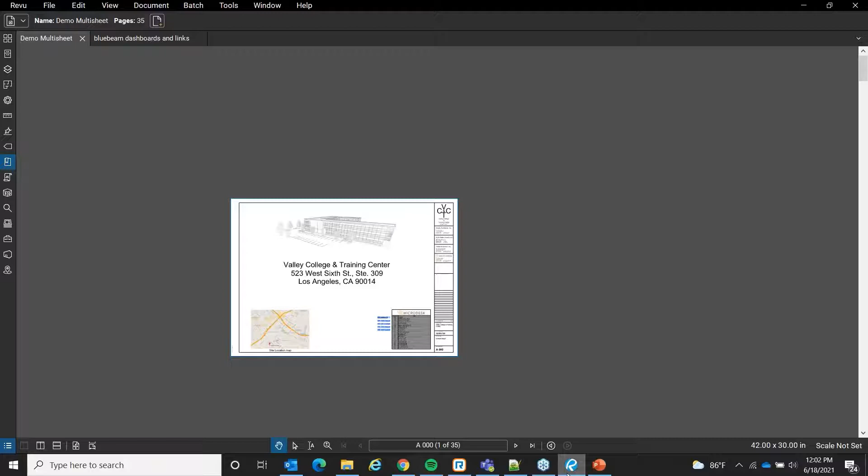All right, so let me go ahead and open up Bluebeam. Okay, and this is just our multi-sheet PDF that we have. So when you initially generate a PDF, all you really have is your thumbnails, and the page labels are just generated from the file name or the sheet name if you're doing it from Revit or Civil 3D. And it may not be all that expressive or useful.

So there's no bookmarks created, there's no real linking happening, so you have to actually help your team do this. So first thing we're going to go over here is how to create decent page labels, and that's using the auto mark tool in Revu.

So that is in the thumbnail pane. I'm just going to go ahead, and I can do these individually if I wanted to, but I'm going to go ahead and try to use the automated tool here, to create page labels.

So this way, I can help people look at the thumbnail and have a better idea of what the sheet is.

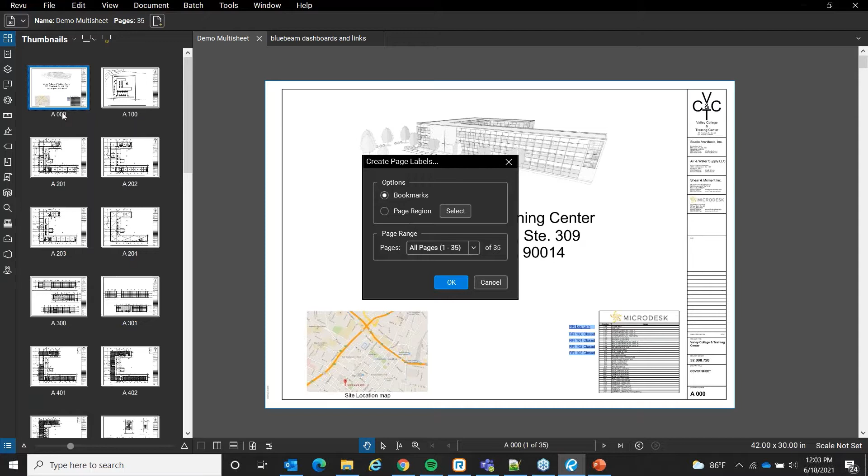So I'm going to use the create page labels tool now. I can do it by bookmarks, or the bookmarks could use the page labels, which is the way I'm going to do it. Utilizing the create page labels tool, I'm going to select page region. This is going to apply to all pages. I can do a custom range, or just the current page, but I'm going to do all the pages in my PDF set.

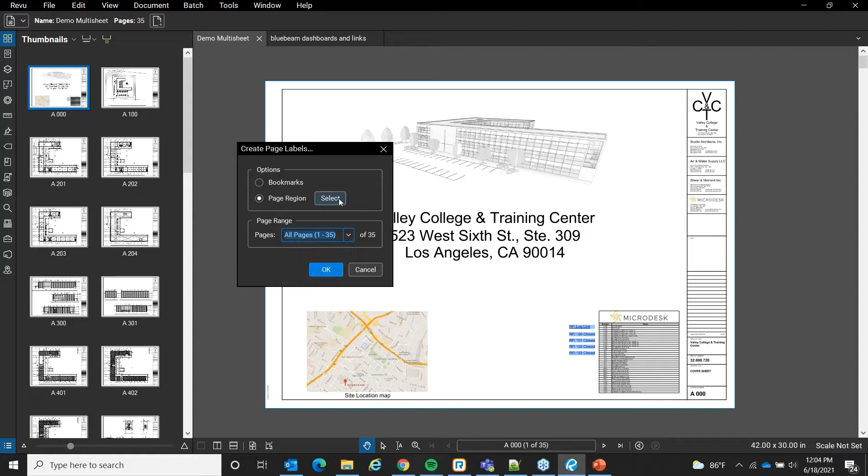So I'm going to select my page region, and this is the first one I'm going to do. I'm going to choose the drawing number as it is right now, and go into my title block to find the area that contains the drawing number. This is going to look and find, and note the text that's created there.

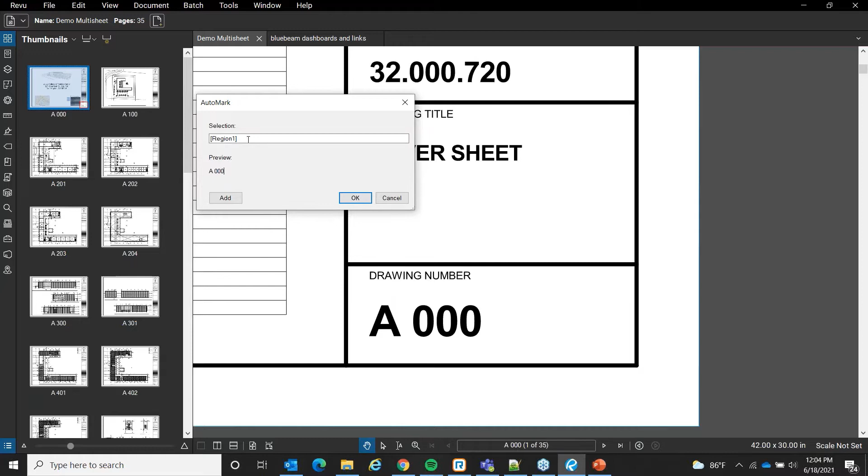And then that's the first region. I can add a second region if I want it to be more descriptive, and I'm going to do that with the drawing title. So I'm going to add the second region, and you can see the little preview here, A000 cover sheet. I can continue adding if I want, but this is good for me right now, because it gives me a description of what each page is. A300 doesn't tell me much of anything, but...

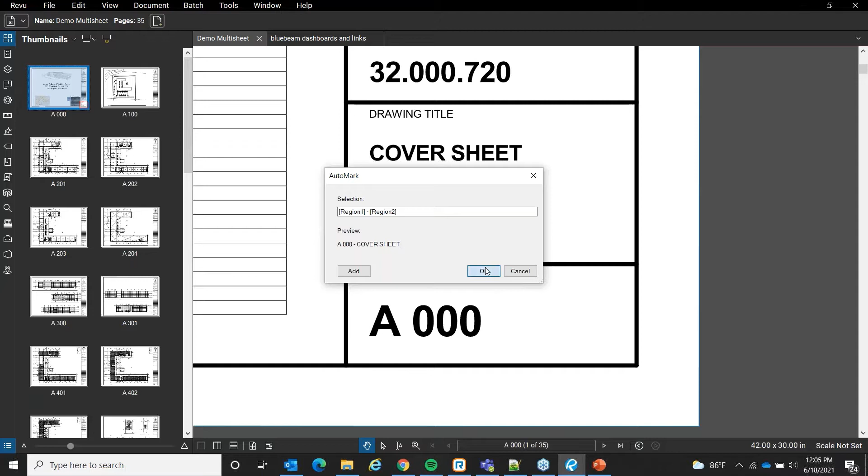Once I create this and click OK, it's going to apply to every single page. 'Exterior elevations' is far more useful to me than just seeing A300. So then you can navigate in your thumbnails and have a better idea of what those actual pages are.

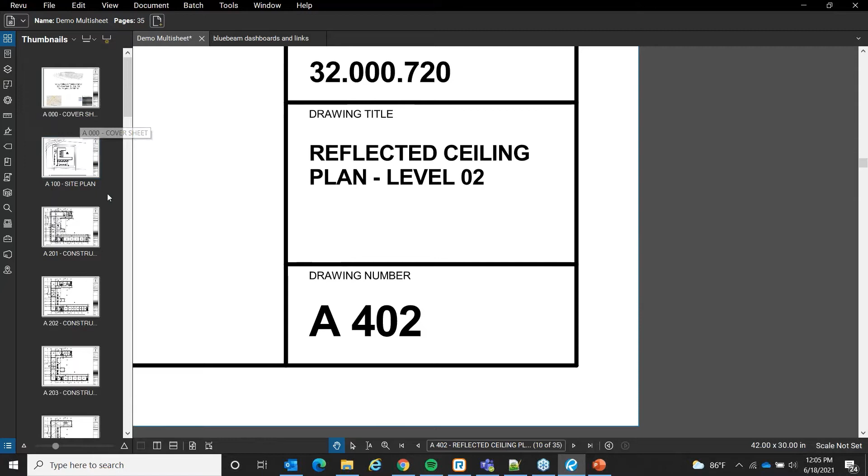Another way people like to navigate is without seeing the thumbnails - they like to look at the bookmarks. So that's the bookmark pane right here. I can automatically create the bookmarks, add individual bookmarks before or after a page, or automatically add them. So I can create bookmarks automatically from my page labels, maybe I wanted to do it one way or the other. Again, I will do them for the entire page range.

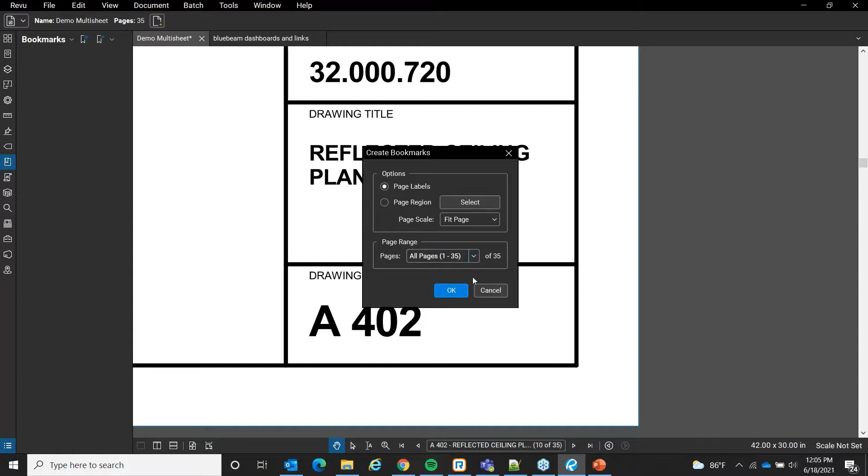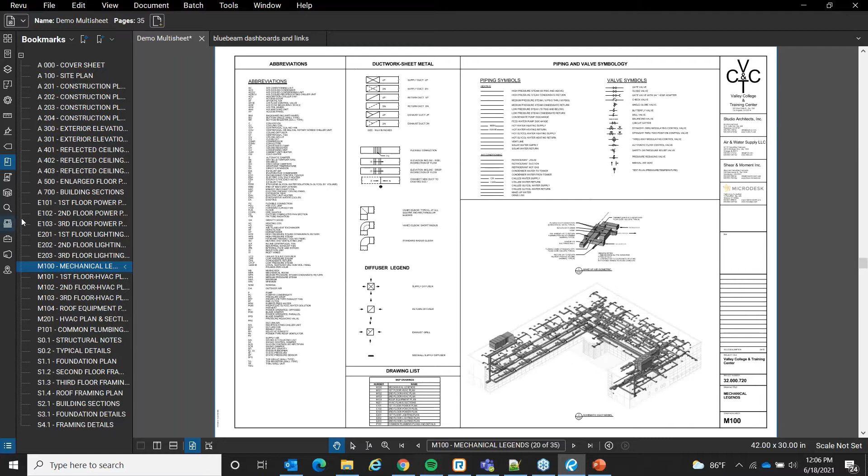And very quickly, we created some bookmarks that really help everyone navigate the PDF that you'll be hosting for your collaborative session. This way people don't have to necessarily know what your nomenclature is, like E300, what does that mean? It just allows everyone to be on the same page and navigate the PDF more smoothly.

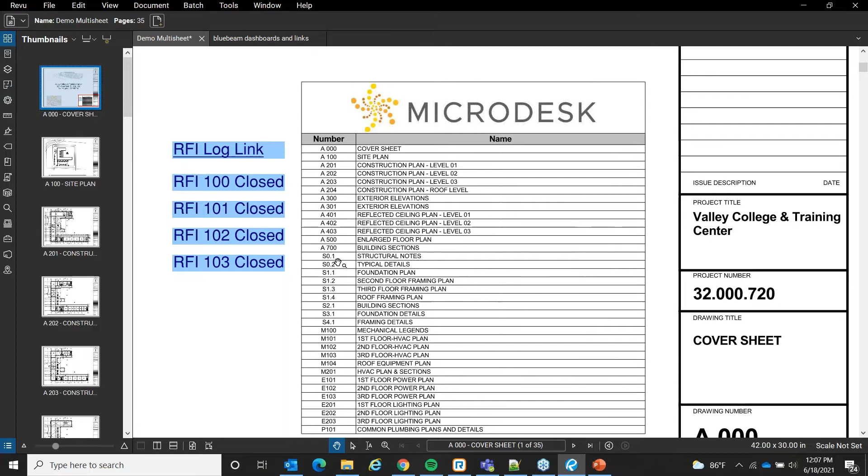Now that's just for ease of understanding. For ease of use, a very handy thing to do is to create hyperlinks. So let's say, for example, I wanted to click and go to S1.2, as opposed to having to find it in the bookmarks, searching that way, or going into my thumbnails. I can just click on here and it'll take me to wherever I need to go. That's a very handy way to do that.

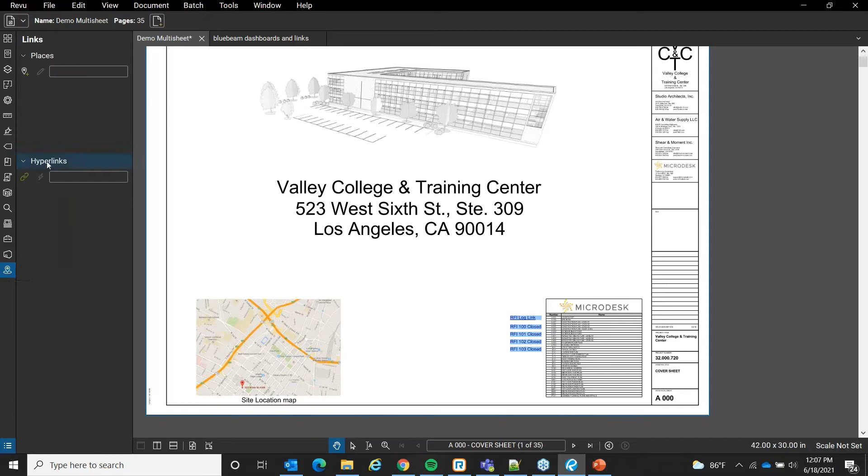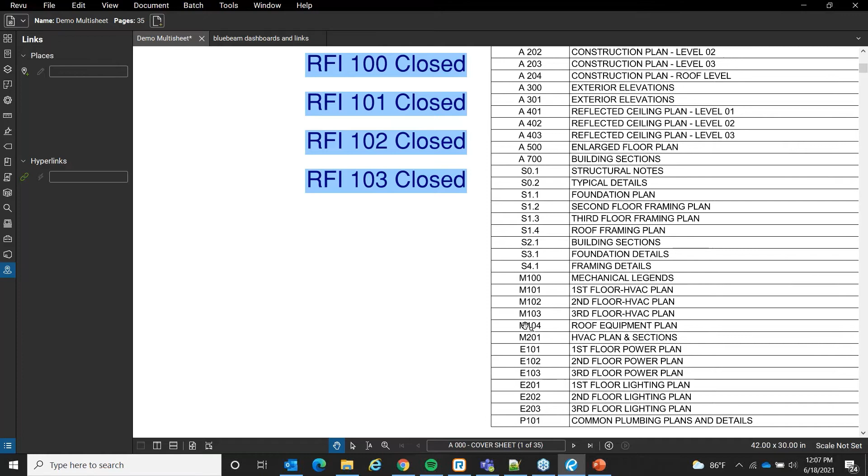A great thing about Bluebeam is that there are lots of automation tools that allow you to quickly provide these solutions. So if I go to the links pane, I can add them individually, but that could be a little annoying because there are a lot of areas where you might see M104 and want to be able to click it and go to that page. You might not, just by going through, be able to find them all on your own - maybe you'll miss a couple.

So one of the cool things is that you can use the batch tools and choose a batch link, and we're going to create a new one here. Okay, now I'm going to add - actually I'll get rid of this one.

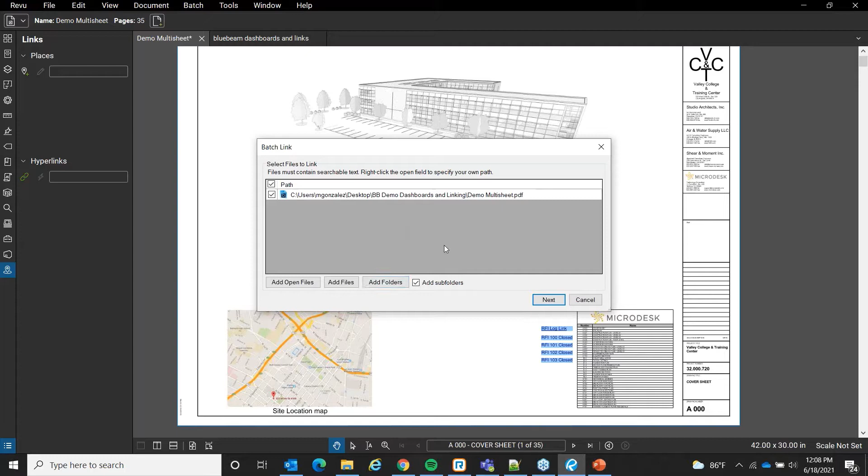Okay, so I'm just going to add this demo multi-sheet file, and you can actually add a whole range of files so that they all work together, or even a whole folder, right? So just an entire project folder of different PDFs, and you can just hyperlink between them, right? Which is awesome. Now this functionality is only available via the Bluebeam Revu Extreme version, not the standard version, but you can still do it manually if you have the standard or Revu CAD.

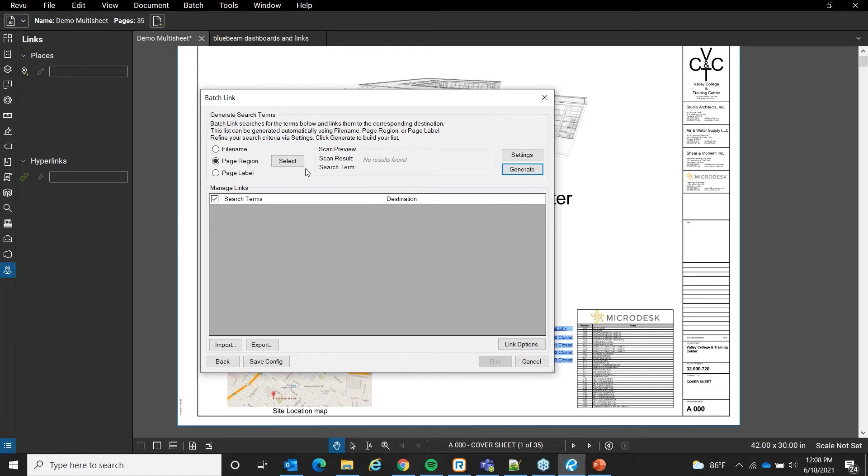So I'm going to go ahead and click next. And what it's going to ask me is, how do I want to search? And so what I want to do is I actually want to search by page region, and I just want to search by the page number, by the drawing number, right?

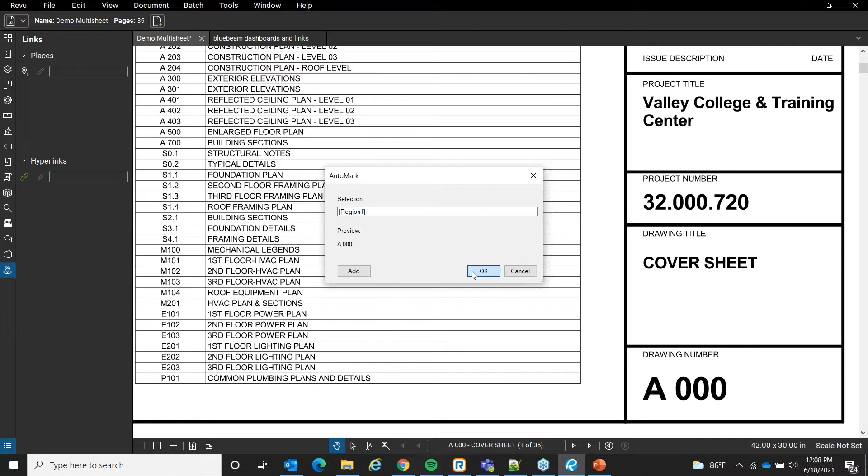And then I can look in my settings for how I want those hyperlinks to be generated, right? I can set a little filter, right? But what it's doing is it's scanning, right? It finds A000, and that's the search term, right? But let me go ahead and quickly just generate these hyperlinks.

Okay, and you'll find that it created these links, and now it knows, okay, I'm going to search for A000, and it's going to look in the entire document or all the documents that you've added to this function, and then it's going to create hyperlinks that will search for that term and then go to that specific page, right, because it found it in that region on those different pages.

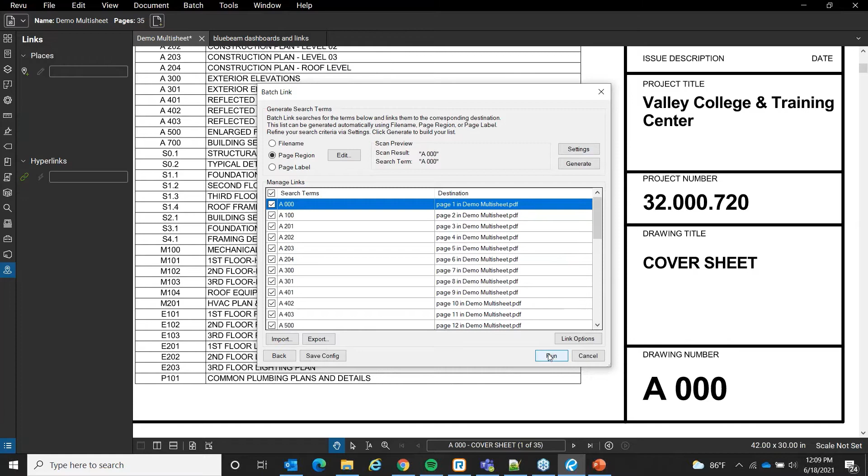So I'm going to go ahead and run it. And it created 128 hyperlinks. So you can see all of these that were created for each page are shown in the links pane. So there's lots of different links that were generated on different pages, right, and they all navigate to each other.

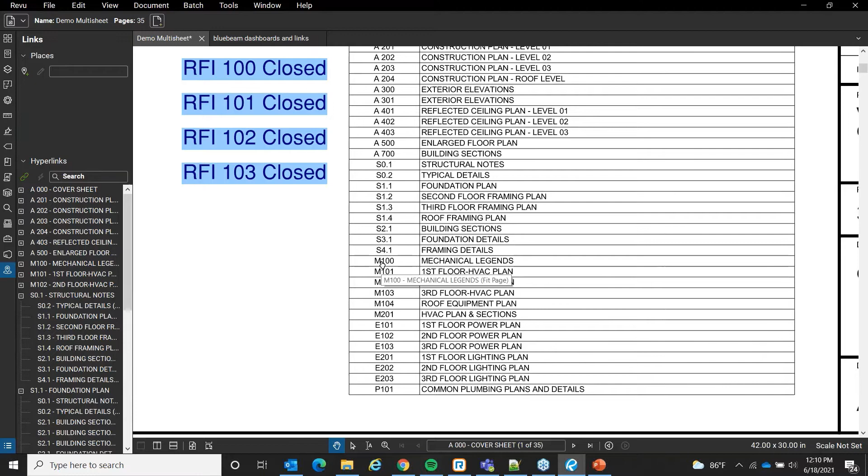And so I can just click on M100, and it would immediately take me to the M100 sheet, right? Which is pretty fantastic. So, and that's kind of just generating a hyperlink.

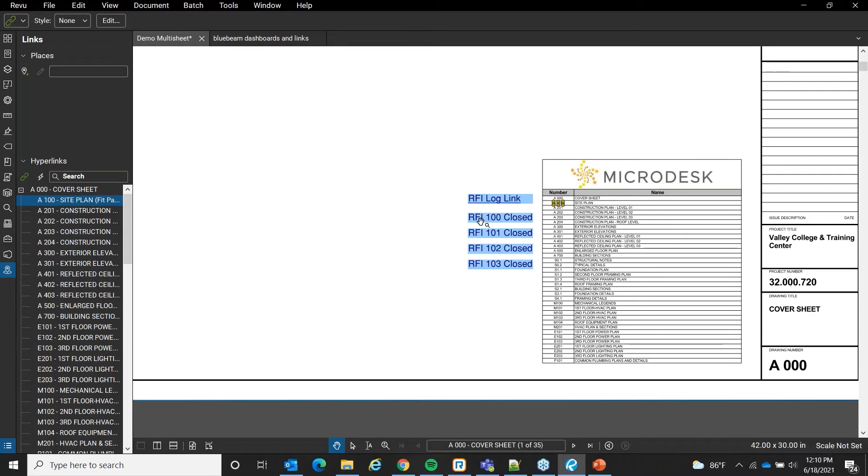Now the hyperlinks themselves can do more than just one function, right? So you can actually select one and it'll take you right to it if you want to see what it is, right, because they actually perform a particular action, okay? So if I edit the action by right-clicking in my links pane, actually what it's doing is that it's jumping to a particular page in my PDF.

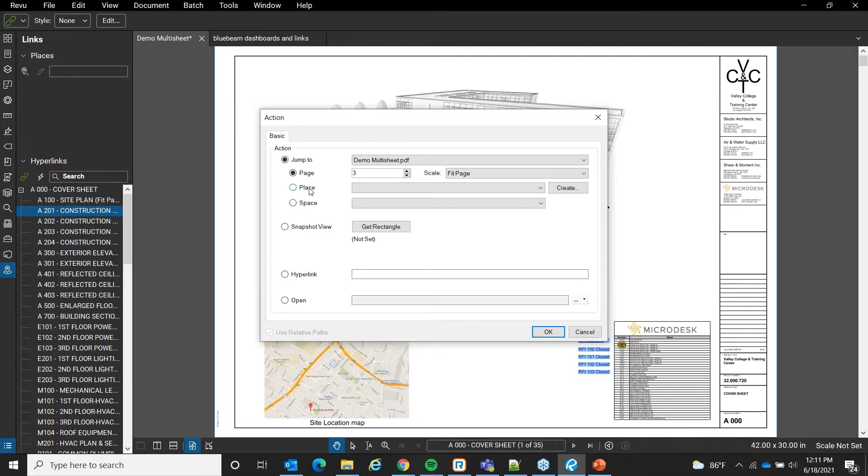Now I can actually have it do a variety of different things. So one thing I can do is I can make it go to spaces. We're not going to go over spaces in this demonstration, but I can also make it go to a particular place, okay? And so I know that on page A700, there's a detail that I want to be able to navigate to over and over again, because it's going to be referenced in a lot of different places, right? So even for example, on this sheet, it goes to A700.

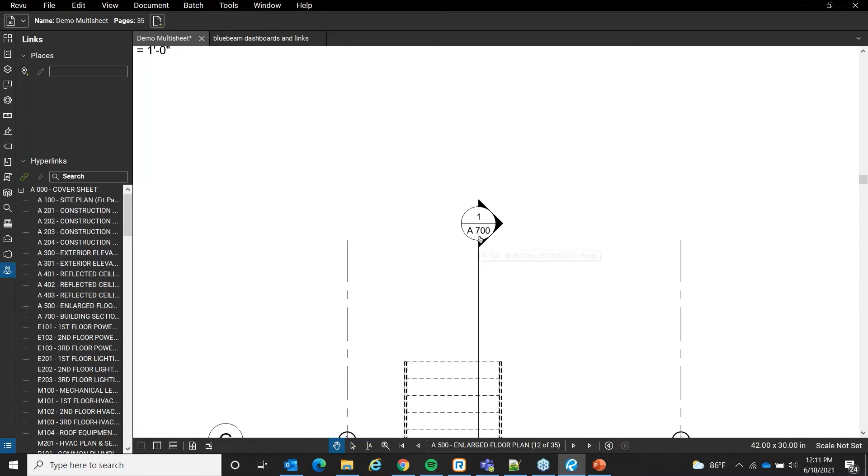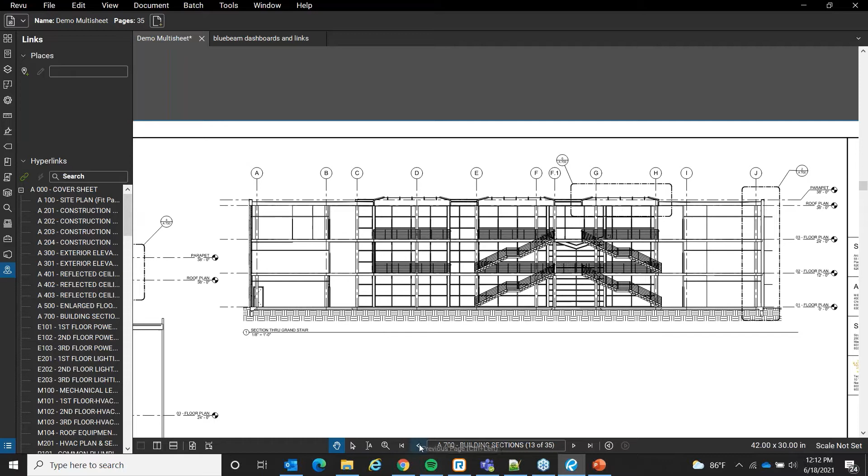Now, right now, the hyperlink is taking me to the page. What I want it to do actually is to take me to the actual detail itself, okay? So one fun thing I like to do is find the little callout, right?

And I'm going to run what's called a visual search. So it's not going to do it necessarily by the text, but it's going to do it by the shape, right? So it's going to find these callouts, right? So let me go ahead and go in my search pane, and I'm going to quickly click on the visual search as opposed to the text search.

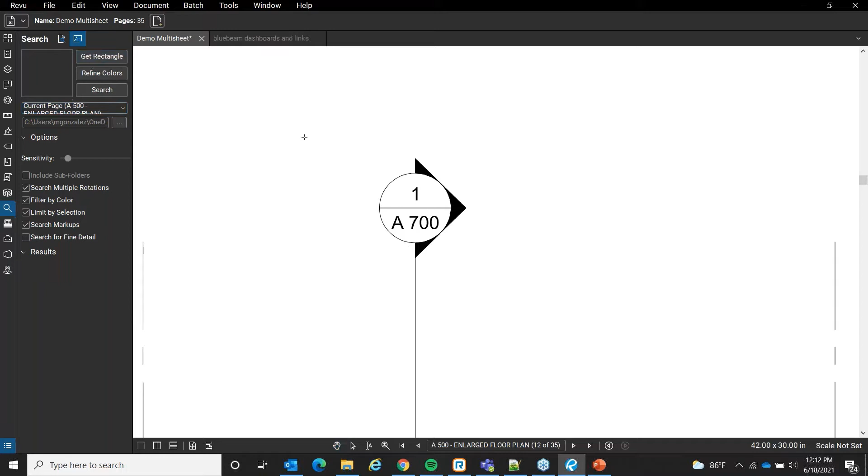Okay, and I'm going to create a little rectangle that's going to encompass this area. So I'm going to choose Get Rectangle. Okay, and then I could choose how I want this thing to search: search the current page, search the current document. Okay, so that's what I'm going to do. I'm going to make it search the current document to find anything like this, right?

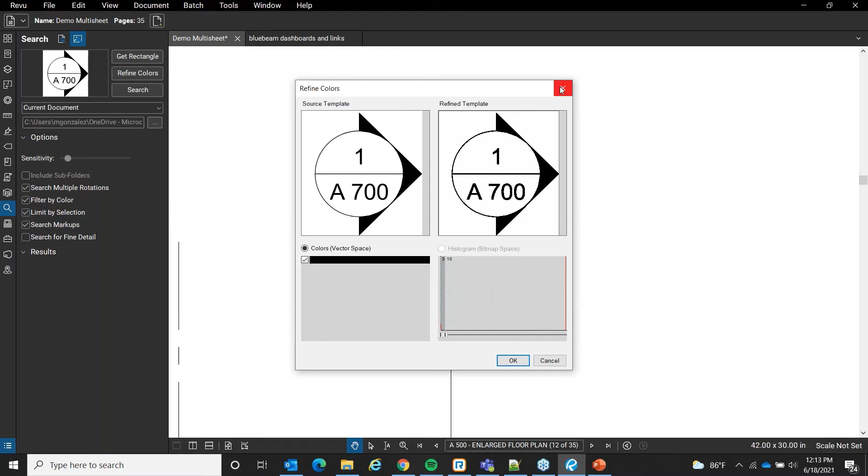And it's smart enough to understand whether it's flipped, upside down, different colors, right? So I can refine the colors too if I wanted to, change how it looks, right? So I'm just going to click search, do this real quick, and I have it on low sensitivity, so it's just going to kind of run through. It might take a minute to find the results because it is doing something pretty impressive.

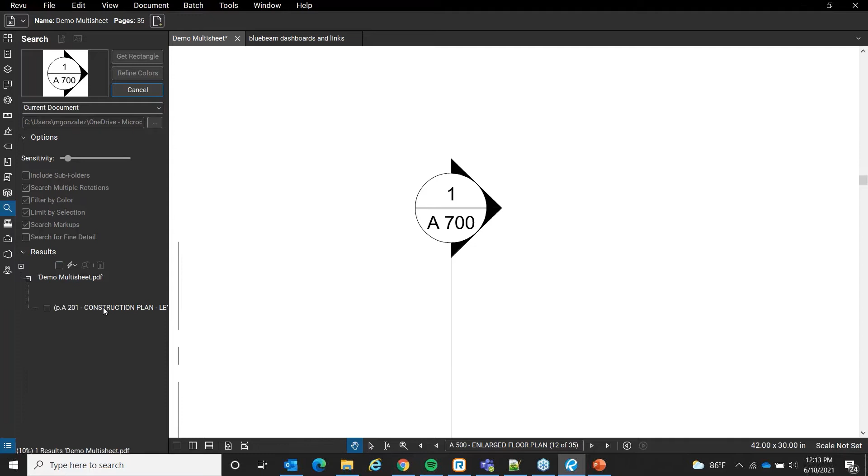And as it goes, you can actually find, okay, so it's on page A201. That's the first one I found. Okay, so it's on A202. There's that guy right there. That's fantastic. Let me expand this a little bit so we can actually see the previews.

All right, so we definitely don't want this one. We do want this—see how it flipped? Okay, now it's finding a few that, all right, but you don't have to check them all on, right?

All right, so that's good enough for now. We're only at 29% of the document, but it's finding a lot of different instances where it's going to find this particular callout. See, it keeps on finding them, keeps on finding them. All right, so I'm going to click cancel here just to expedite the process.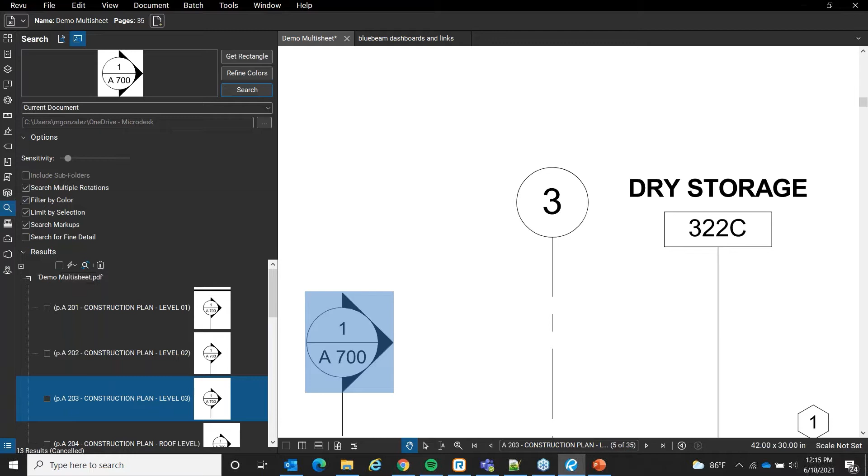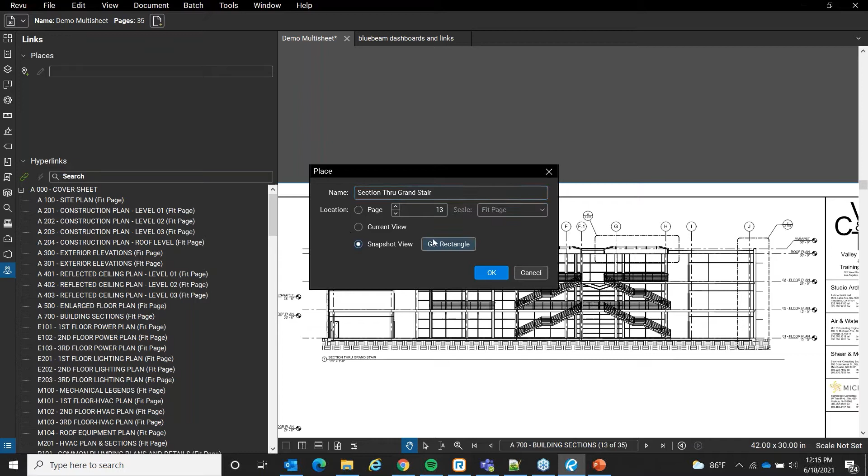Okay, and it's going to be stored in here. So I'm actually going to go back to page A700, and go back to my links pane. And I'm going to create what's called a place, okay? This is essentially a specific view on a particular page for a link to go to. So I'm going to click in my links pane on place, under places add a place, okay? This is the section through the grand stair. Okay, and then I'm going to use a snapshot view so I can get it in a zoomed-in view here, right? So specifically it's going to go here as opposed to the entire page, right? And that's the section, or that's the place.

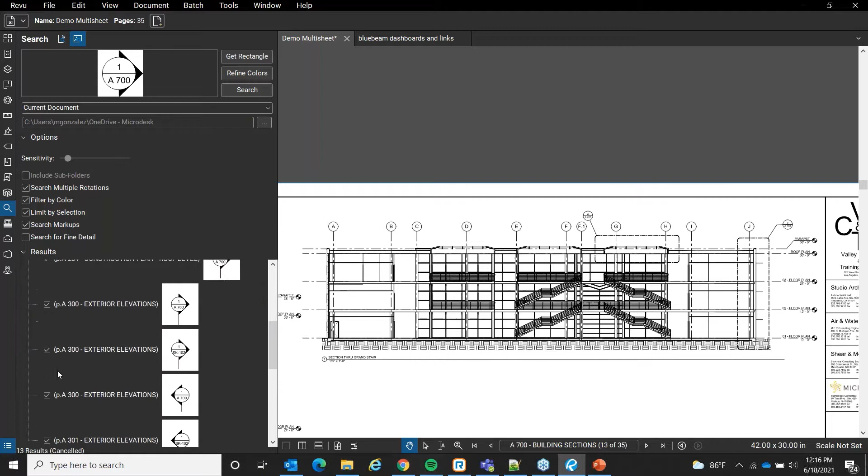All right, so now I can go back to my visual search very quickly and check on all the ones I want. So I'm just going to check off the ones I don't want. Check them all on, and then check off the ones that don't really work. Check that one off, check that one off. Right, and all the other ones are good, right?

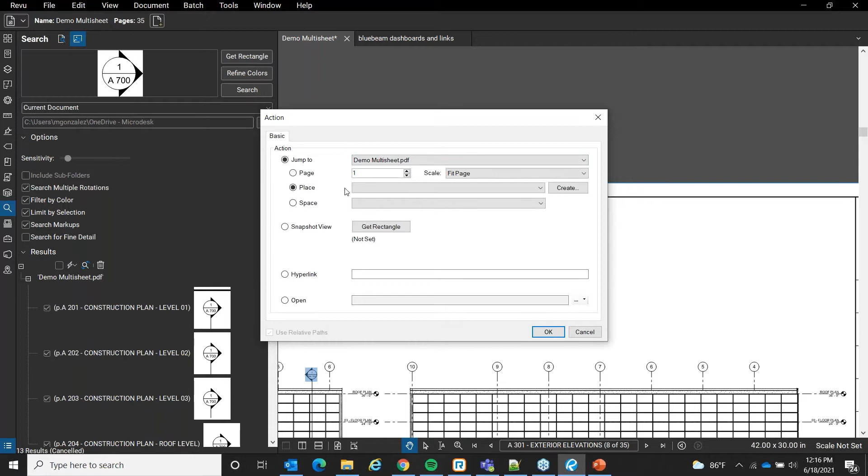So now what I could do is pull down this little lightning bolt for all the objects that were found via the visual search. And I'm going to hyperlink them, okay? And instead of jumping to a particular page, I'm going to choose for them to jump to a place that I assigned—the section through Grand Stair. I click OK. And now I can navigate to one of these that I found, okay?

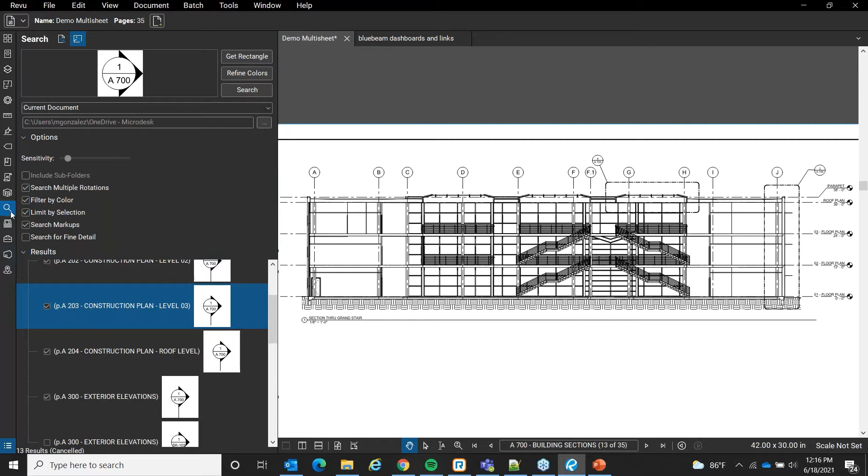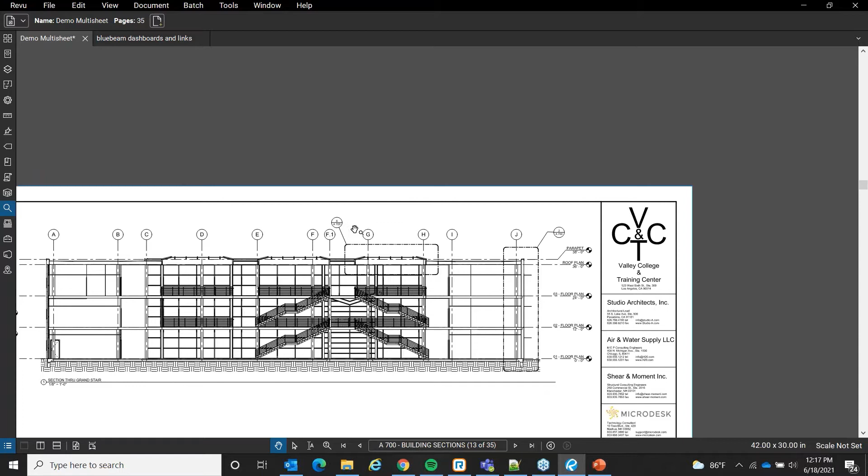And I just click in this area, boom, and it takes me directly to that section, right? So you can do this with all your different details, and it really makes it easy to navigate your PDF for all your different users that'll be jumping on. Again, for people unfamiliar with your plan set, it makes it a lot easier for you to understand exactly what it is that you're trying to do, or what's in the actual plan. It makes it easier for people to find things that they need to work on. So that's just a really useful way to prepare your documents for use.

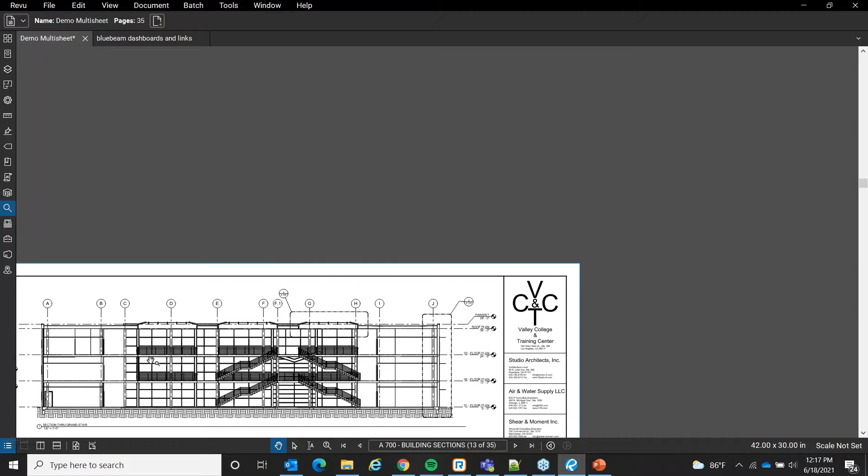Another thing you're going to need to do to prepare your document is actually have custom columns, all right? If you're going to be doing something like a takeoff review session, you're going to want particular columns for your different tools. So let's say you're doing a quantity takeoff in a studio session. What happens is the document will save whatever column situation you have with your markups list. So whenever you load up a document to the studio session, it's going to have, for all different users, the markups list as when you saved it, and that's going to include any custom columns you might have.

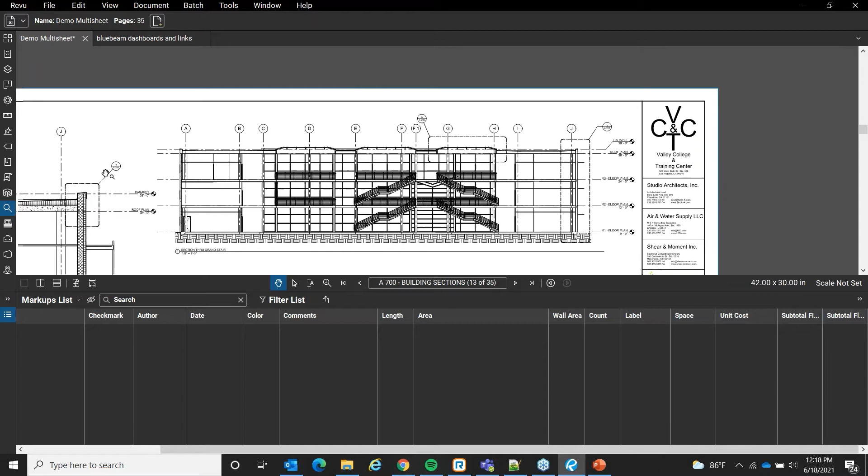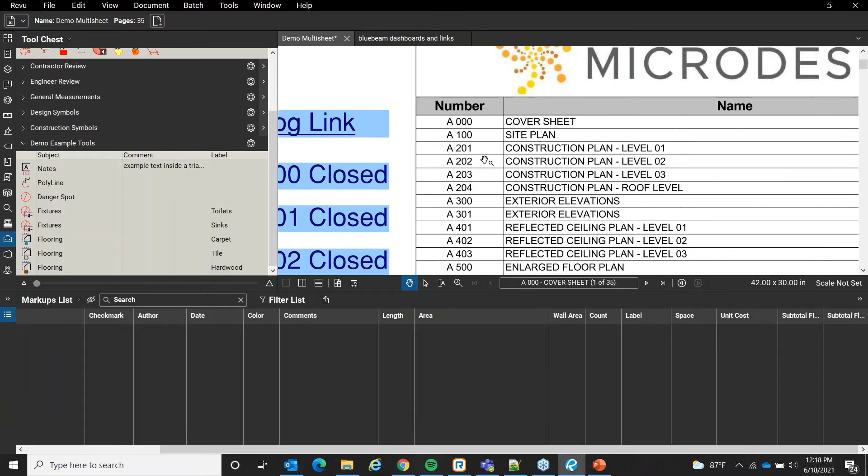So you might have some particular tools, right? Maybe I have some particular tools for my fixtures, my sinks. Let me go back to my—right, so I might have fixtures here, sinks over there. So I might have a bunch of different stuff that I want to maybe take counts or measurements of, right? And these are using custom columns, so I have custom properties.

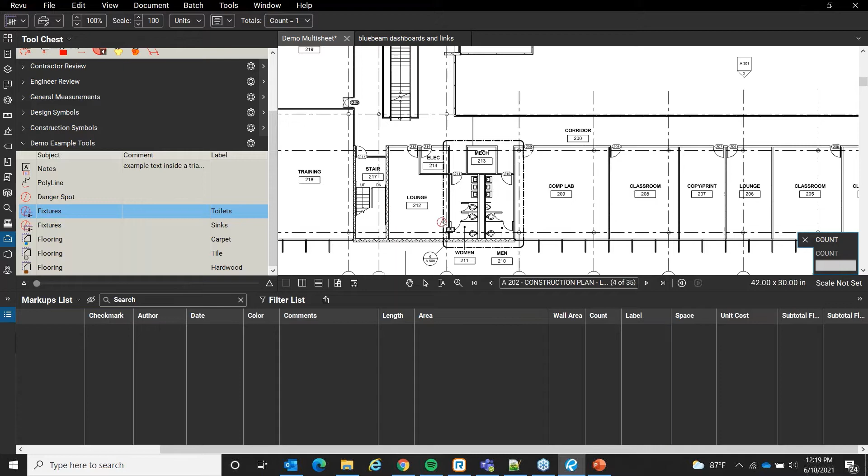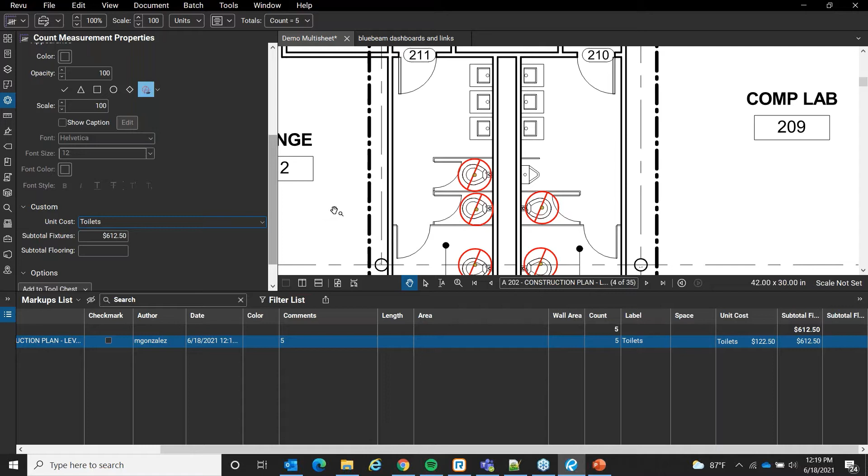Right, so I might click toilets, and I could do this, or I could do the cool visual search thing I did earlier and apply a count to them, right? And these might have assigned to them a particular unit cost—so these might be toilets, and we'd have that tool automatically in there, ready to go. So just kind of a pre-made unit cost for these particular items, and this is just an example. And so you would want anyone working on your takeoff session to be able to use these tools and these columns, right? So that would entail you having these custom columns already generated.

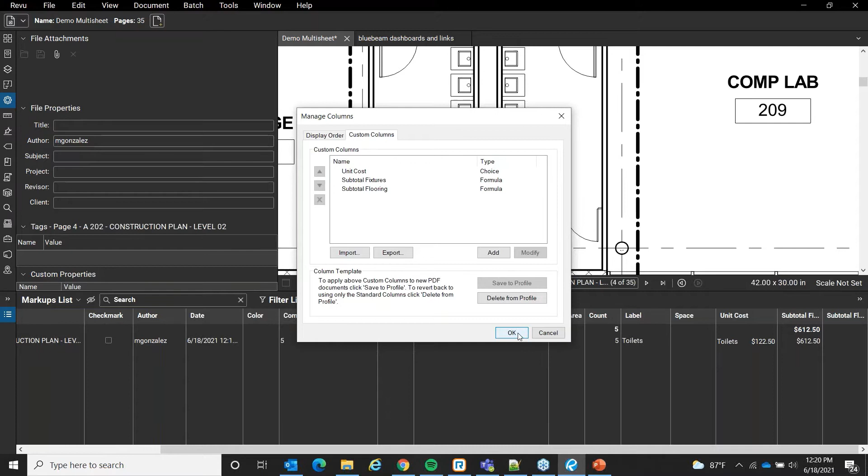Because you have something in mind that you want people to do, right? So I already have these custom columns saved to my profile. What that means is that anytime you create a new PDF or generate a PDF, these columns will be available within your profile.

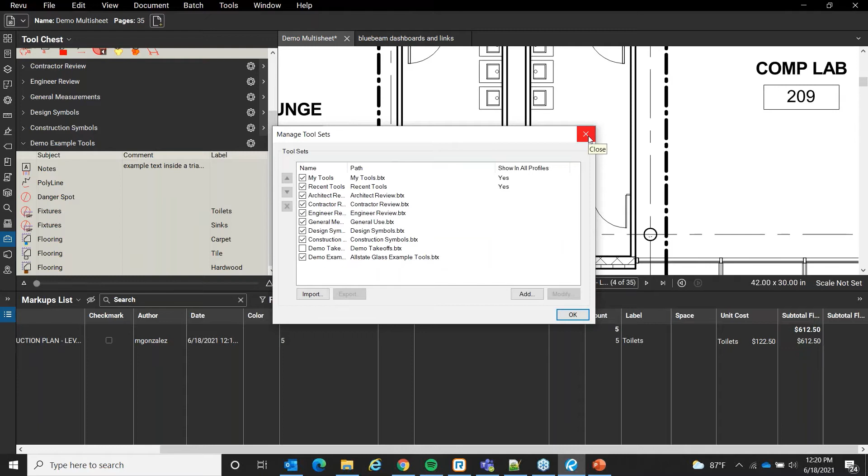And the tools, you can actually import them yourself. You can go to tool chest, manage tool sets, and import tools from here. So you can give everyone in your session these tools, since you've already set up how you want people to work. Allow them to navigate the PDF and work the way you want them to by using the tools you assigned and the columns that work with those tools.

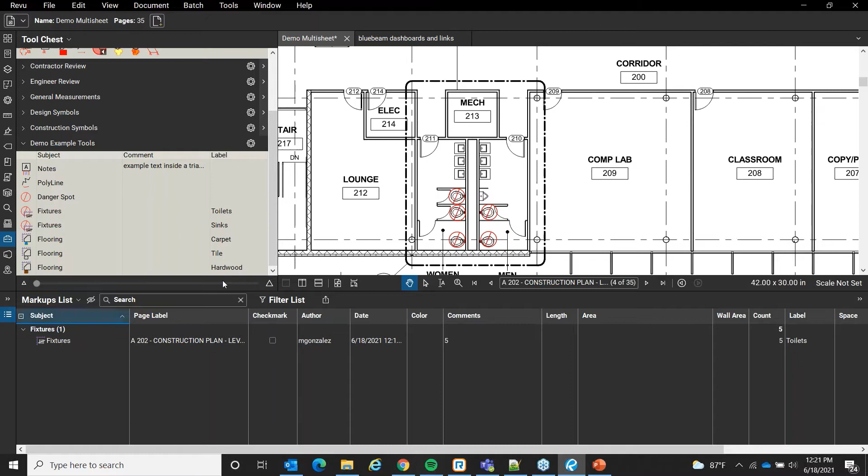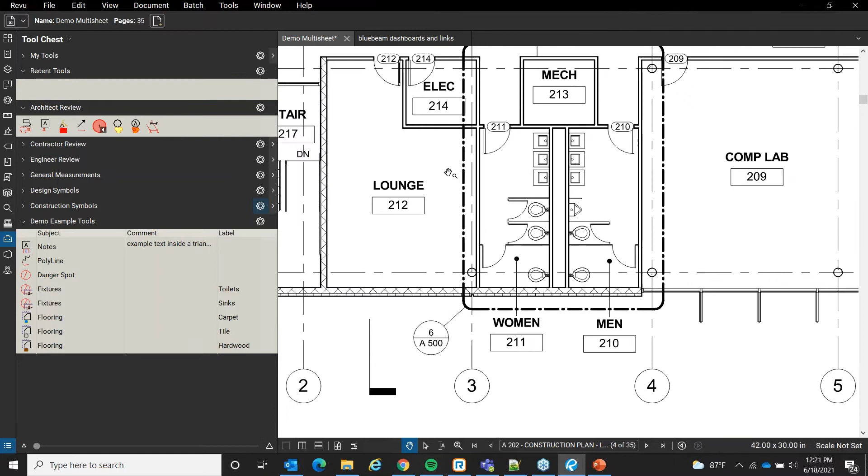One thing that's going to be kind of difficult is getting people these tools, especially if you're not the person who sets up the studio session. I'll go ahead and delete this. If I were to create a studio, and you were to delegate creating a studio session to someone else, they would need this profile to get these columns, and they would need the tools you have to create the takeoffs.

To that end, you can create something called a digital dashboard, which is just a neat way to create a PDF that already has links to different tools. Now these hyperlinks, if I edit the action here, could actually go to a different PDF, so you can choose to open a file. That'd be if it was something maybe on your network server.

If everyone had access to the same folder, but maybe you're sending this to someone outside your company, and you want them to start it, or someone's working from home and not VPNing. Maybe you're doing a completely remote thing where you don't all have access to the same mapped drive. So one idea I like is perhaps you can host everything in a studio project.

I have this PDF created, and I actually generated it from Microsoft PowerPoint, because it has these smart art tools which already look like buttons. It's a really handy, easy way to create it, and then you print it to a PDF, which is great, very fast and easy to create this sort of thing. Then you just, as before, this time manually, create a hyperlink.

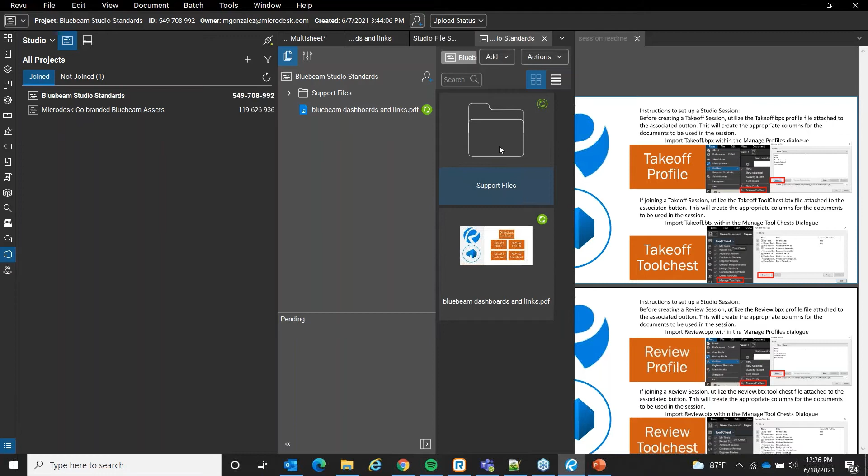One thing you can do is set up my file here, and then I made a little support folder within my studio project. And within there, you can actually host your different tool chests, your different profiles.

So you would give your profile to whoever's going to create the studio session for collaboration. They would have all the columns available needed. They would make the document, set it up, save it. And then you can have your end users in the studio session download the tool chests, just by clicking that one button.

They can use the tool chest. First, they'd probably read the directions, grab the tool chest, download it. And the nice thing is, the person would set up the studio session, all the custom columns are already set up, the custom tool chest is ready to go.

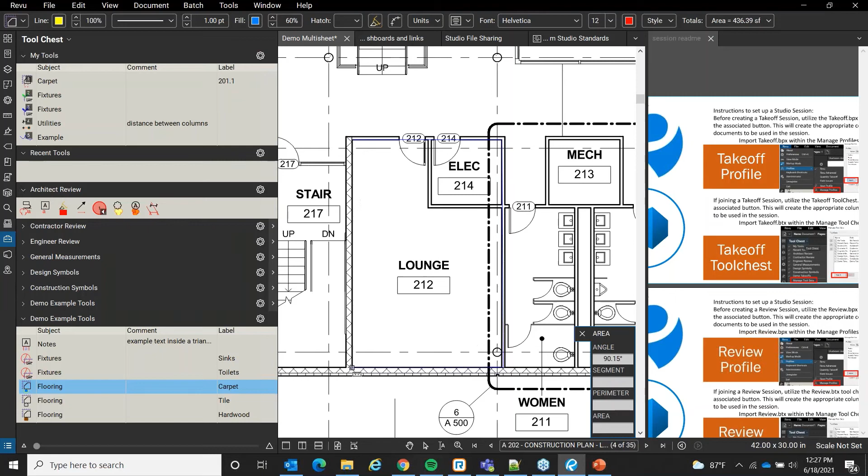You can just start clicking and adding your takeoff markups. I'll just go with a preset. And that would show up in here, already ready to go.

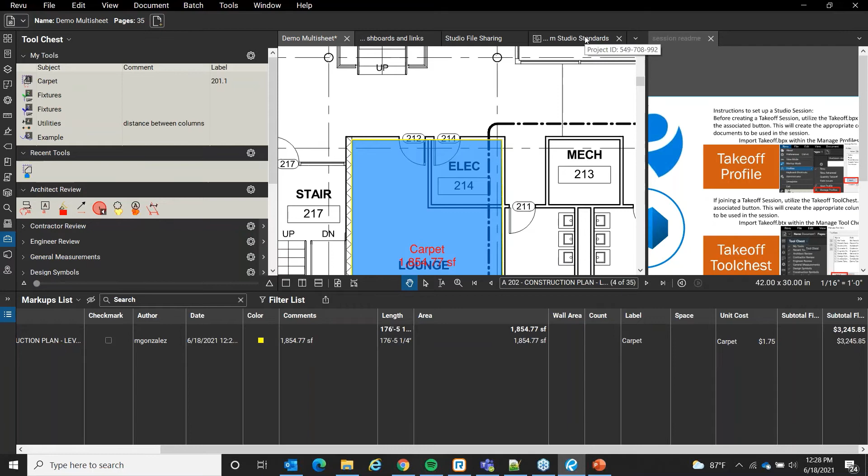So the basic idea is just ways to streamline how you get everyone to be on the same page, using all the same tools in a manner that you can control and organize, and have everyone have easy access to it.

And the way in the studio projects that you'd actually be able to host different files is by right-clicking in files uploaded to a studio project. You can actually share a link.

Actually, let me cancel here. Let me find the one I want. I wanted the review profile, so let me find the review profile. So that's in the support files, review BPX, that's the profile file.

And grab a share link here. Click OK for the lifetime of the project. So I can share the file for the lifetime of the studio project, and you can just keep this thing open forever. I can require a password if I want, but I won't for now, since I'm sharing it with a bunch of people. I'm gonna click OK.

Copy the link to share. And then I can just use this and hyperlink, make a little hyperlink here, and paste that right there.

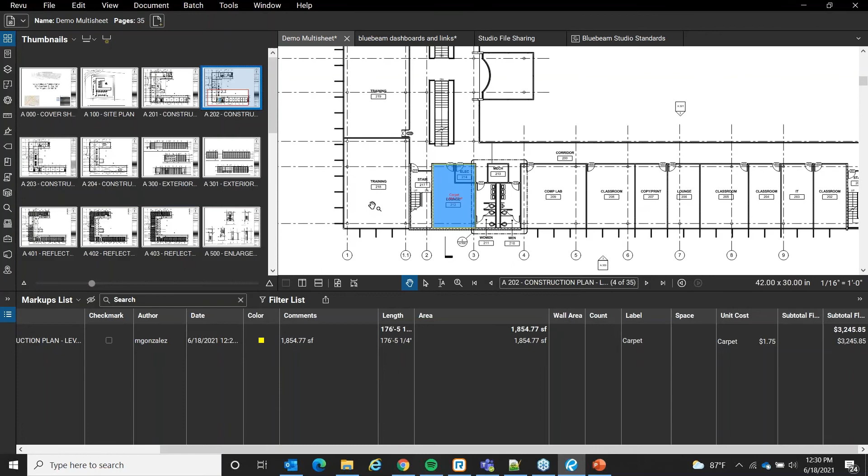So to review, we make the PDF nice and navigable by creating bookmarks, hyperlinks, and page labels, making it easy for everyone to go through. And then to create a studio session, you would save it with your profile that you can load up by managing profiles and loading up that BPX file you just downloaded from your studio project, which contains all your custom columns and the columns you want to show in the studio session. And then from there, people can download from the dashboard the different tool chests.

All right, so I guess at this point, I'll open it up to questions.

Can I share the dashboard and links to those profiles and tool chests? I don't know who's asking this. Let me pop out the questions panel.

Is there any reverse link? I use the batch link function, and many times I wonder this. For example, I want some of the details, I want to know where this is called out. I see.

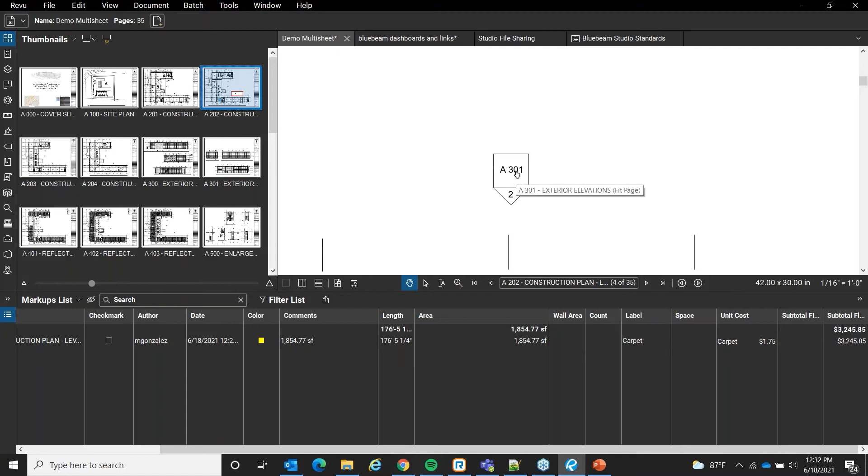So, you're trying to see if you basically click on a hyperlink, whether you can go back to where you clicked from. So if you do click on a hyperlink and want to go back to the exact thing you were at, one thing you could do is go to your previous view, and that'll take you to the exact previous thing you were looking at. But it doesn't necessarily go back to the hyperlink that brought you there, because it's kind of a one-way street. It'll just bring you to whatever page the hyperlink is defining.

You could totally use this previous view, and you can go back quite a ways to bring you back to whatever you clicked.

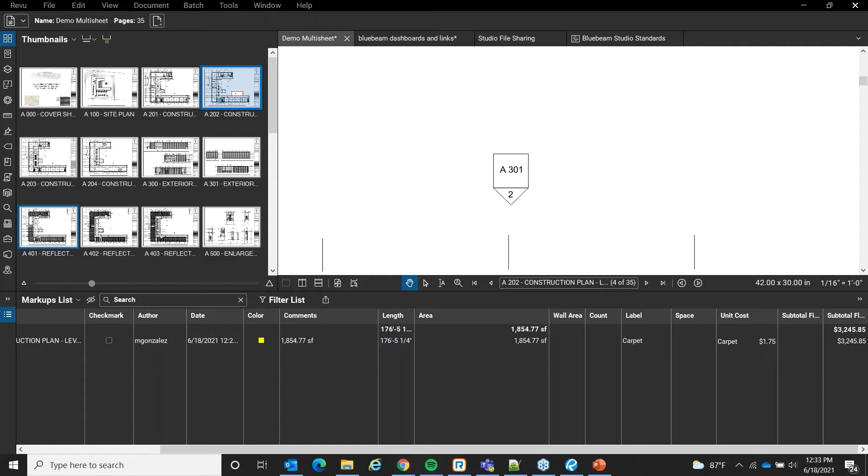I'm seeing another question: can you share with us the dashboard and links to those profiles and tool chests? I suppose, but they wouldn't be particularly useful to anyone else. This was just a demonstration.

All this was just linking to these little files that I added to my Bluebeam Studio project. It could be anything, right? This one was just opening up a PDF, and that's also something that I saved here, my session README.

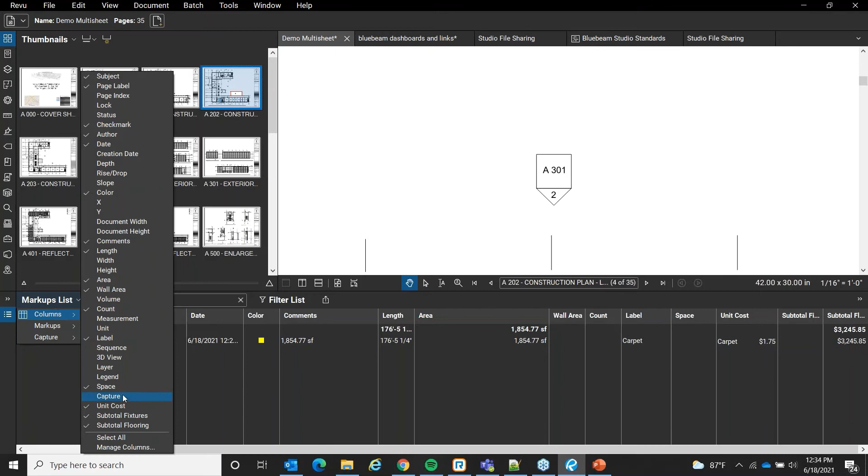So custom columns, that's a good question. You'd go into your markups list. Again, you want to be in a particular profile when you do this. Just so you know, you can't have multiple groups of custom columns. You can only have one set of custom columns within a profile. So if you already had a profile with custom columns, you'd go in there.

If you didn't want to overwrite them, because you start new stuff, you'd probably want to export them to an XML file and then bring them into another project, and start over from there. So you can export the custom columns if you want, but really what you just do is go to your markups list, pull it down, columns, manage columns, go to your custom columns.

And you can add a new custom column, and they're just different types of columns. Are you going to be doing it by a formula? Is it a choice? Is it just a check mark you want to turn on and off? I like to do a choice, and then you can add different items to those choices. That's kind of what I did for the flooring and fixtures, that it was a choice.

Let me just show you what I did here. Let me just modify... Oh, actually, I'll go to unit cost. This is what I created earlier, so I'm going to modify this.

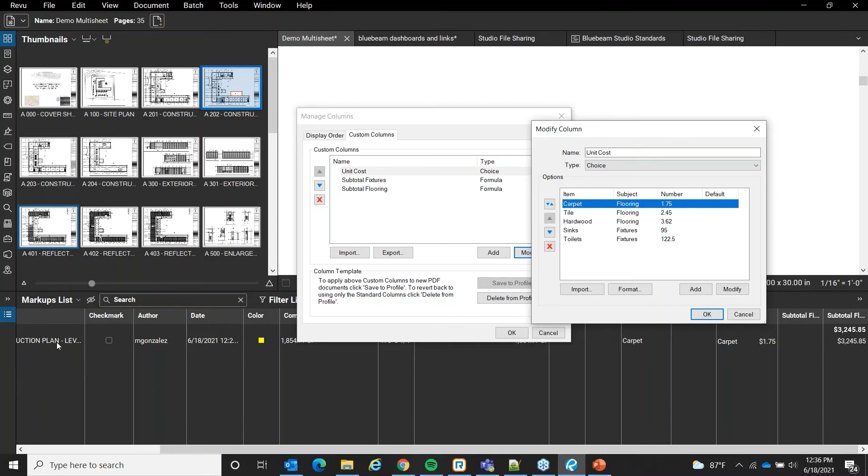This was a choice, and I created a series of choices. So if the markup subject matches this subject, it will become available as a choice in the properties of the markup. And then you could just assign that property to the markup, and once you've added it to the markup, you would add it to a tool chest, and that would just be part of it.

So anytime you added it, it would have these values already set. The unit cost is already assigned, you can see that here, that's a custom column. And I made a little subtotal, which is a formula using the unit cost, which is now a property because it's a column, times the area property of the markup. And they just kind of formatted it, so that's subtotal flooring, that's what I got right there.

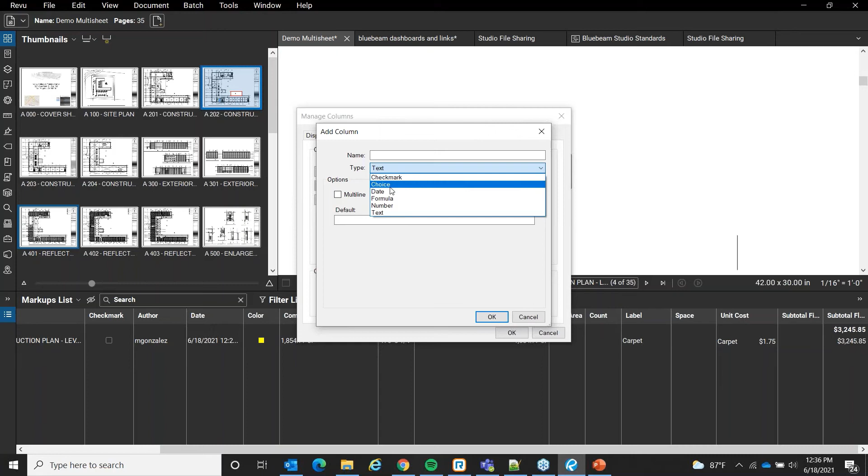So that's kind of how that custom column works, and there's different ways you can add different custom columns. Again, they could just be text, you just fill something in, depending on different things you want to do. Again, it's about being creative with it. It is custom, so you can do anything you want.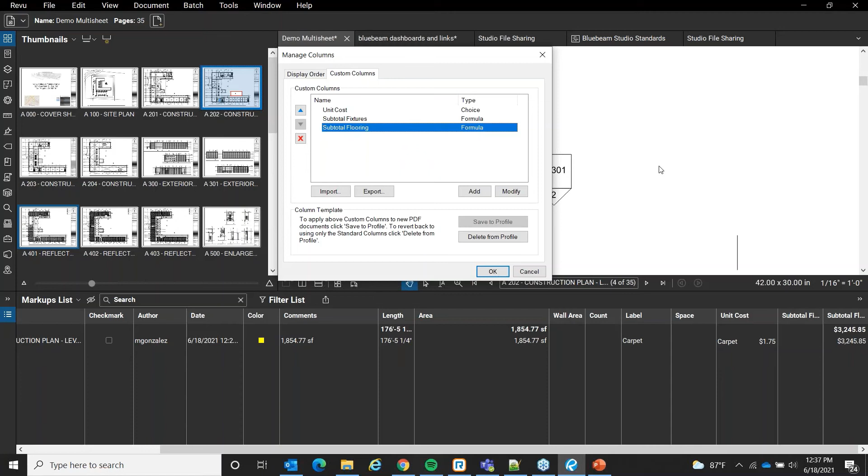But yeah, you add those custom columns, and they'll be part of your profile, which is why I was mentioning that you'd want to share your profile with whoever's going to be creating the studio sessions, because it will have those custom columns, and that'll be saved. That'll be part of your PDF document, and then you can use the custom takeoff tools or review tools, whatever you need, to have people work.

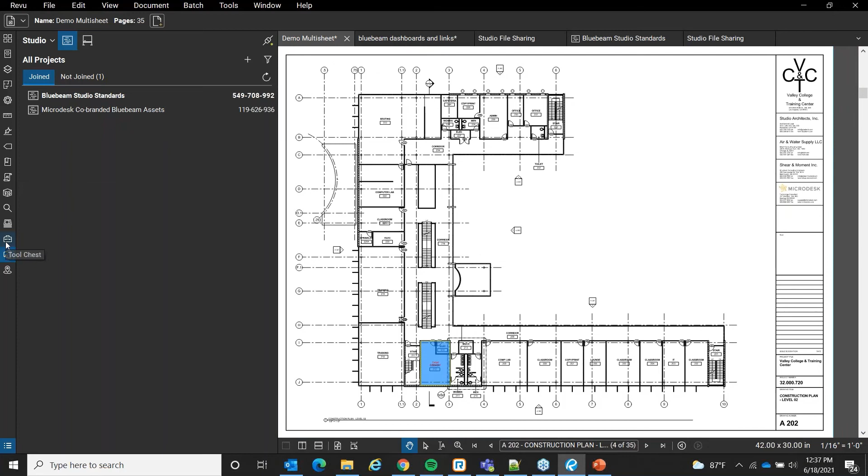Just so you guys are wondering, one of the cool things about setting up studio sessions is that you don't need a registered version of Revu. You can even have someone be in view mode, which doesn't use an actual seat of Bluebeam, and that end user could still import a tool chest and use that tool chest in the studio session. So they wouldn't be able to mark up anything outside of the studio session if they didn't have a licensed version of Revu.

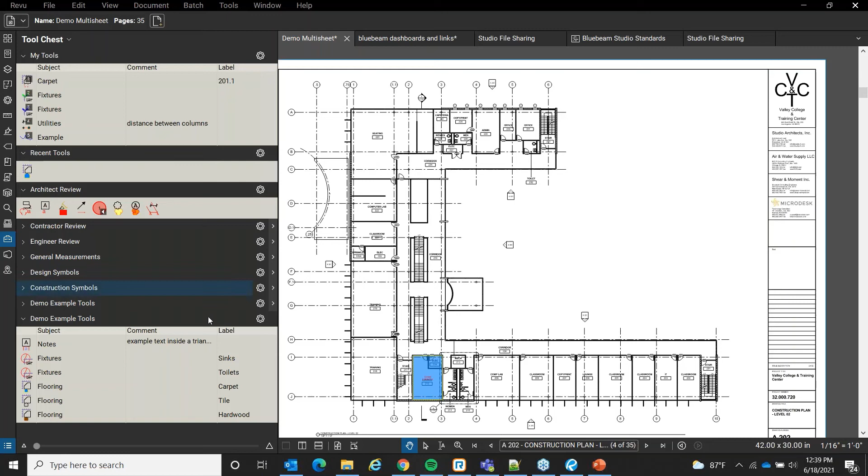When you customize the markups list when generating a summary, can the summary be customized to show the same columns? Yes. Anytime you create a markup summary, you just have options of which columns you want to turn on or off. Anything that's in your markups list, any columns that are available, will be available to be part of your summary, and you could filter and sort and do all that stuff when creating the summary.

So just kind of when you create it, you go to over here. Is there any other questions?

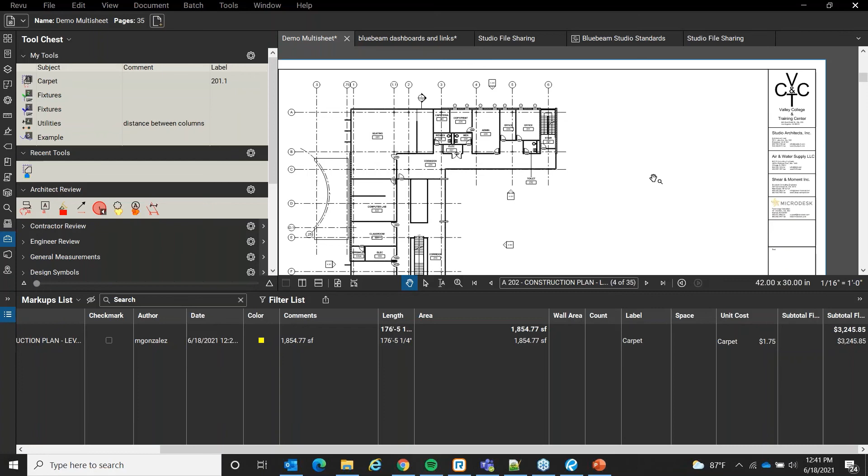If you plot to PDF not through a Bluebeam printer, it might not necessarily recognize the .shx fonts from AutoCAD, but if you do it from the actual plugin button, or just using Bluebeam as your plotter, it will recognize the text, and you can search for it and it'll do all the batch linking, because it's really just about it being text in the PDF. So if it's not searchable, if you can't even select it as text, it might not find it because it's doing a text search.

So at that point, you might want to consider doing an OCR, but if it is a true type font, that will never be a problem, no matter where it's printed. But if you do have SHX fonts, again, if they're plotted through Bluebeam from AutoCAD, then it should be okay. Yeah, especially if you had the Revu CAD version, at least. All right, that was an excellent question.